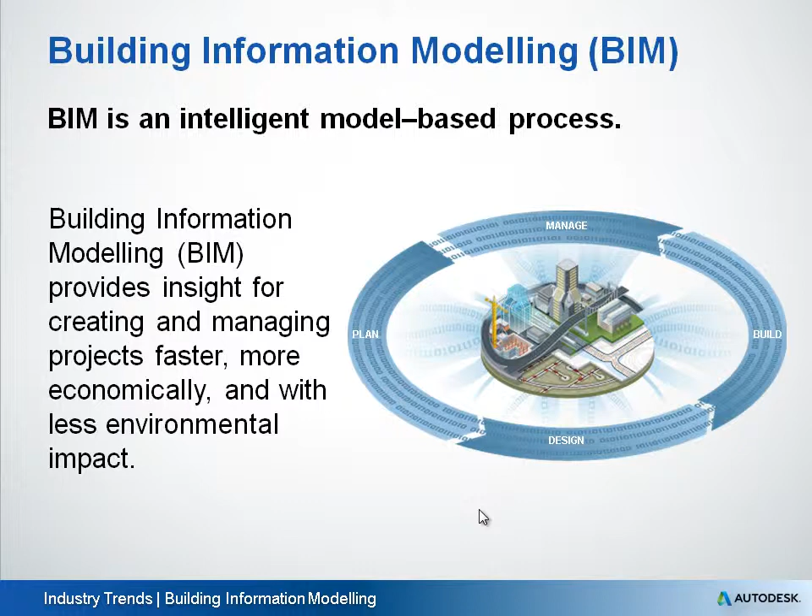A global market analysis and forecast done by Pike Research on building information modeling in 2012 concluded that, for those who are or have been using BIM tools and collaboration techniques for a longer period of time, BIM has proven to be remarkably successful in the quality of the results that it can produce. As for building owners and financiers, BIM has driven costs down and made the estimation process more accurate. Additionally, BIM helps facilitate more visibility and interaction in the overall design build process for the owners of a building, enabling them to take a more active role in determining the final outcome of capital-intensive projects.

In addition, Pike Research suggests that as energy conservation and carbon emissions become increasingly important on a global basis, the adoption of BIM tools and practices will become a higher priority, since it can significantly affect the efficient use of valuable and scarce resources. According to Pike Research, early adopters of BIM tools and practices can gain a significant advantage over their competition. Most BIM applications will be performed on new construction activities, although building retrofits provide a sizable market as well. One of the main reasons for performing a retrofit is to reduce energy consumption, and the latest BIM tools support this work through the availability of rapid energy modeling technologies.

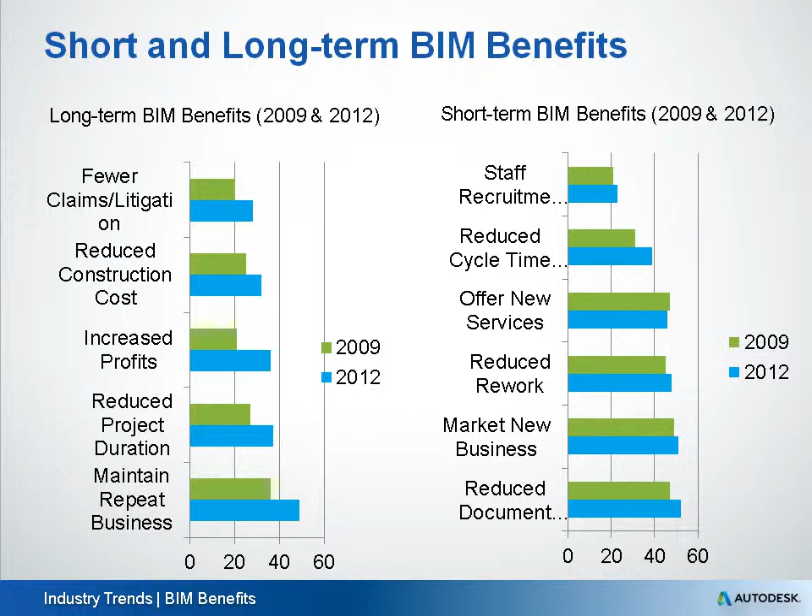In addition, engineers are among the fastest growing segment of new adopters of BIM, so there's a lot of opportunity for engineers to still realize the benefits of BIM.

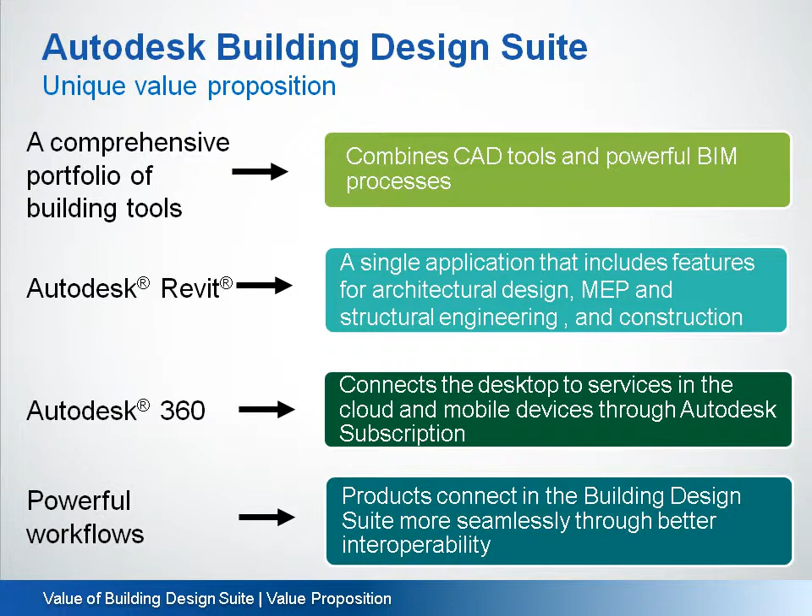It also includes Showcase, which is a 3D presentation and 3D visualization software. And you'll also get SketchBook Designer, which is exclusive to the Design and Creation suites. This enables you to create breakthrough conceptual design sketches for AutoCAD software. New to the suite are AutoCAD Raster Design, Raster to Vector Conversion software, and Autodesk ReCap software, which enables you to capture design information and bring it into your software.

The Premium Edition builds on the Standard Edition and is ideal for architects and engineers who need an optimized set of tools that includes AutoCAD software and adds the power of building information modeling with Revit 2014. It also includes Autodesk 3ds Max Design 2014 software for even more compelling visualizations, and Navisworks Simulate, which provides advanced tools for simulation and powerful features to help you better communicate project information.

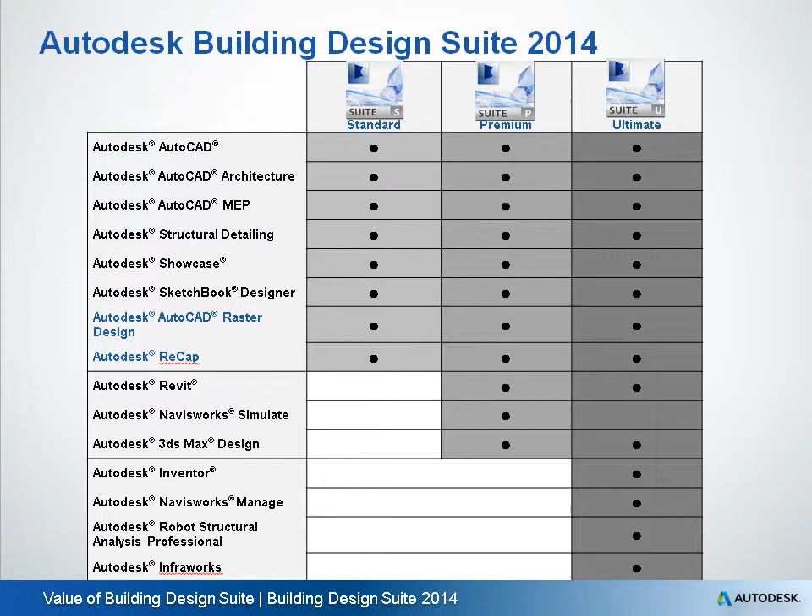Now, those 3 editions of Building Design Suite 2014 have varying Autodesk 360 cloud services available with them. All editions on Autodesk subscription have basic storage, view, and collaboration entitlements. Cloud credits are units of measure that are used to pay for the use of the add-on services. Building Design Suite Standard on subscription includes rendering with Autodesk 360 and Green Building Studio web-based energy analysis software that can help architects and designers perform whole building analysis, optimize energy efficiency, and work towards carbon neutrality earlier in the design process. Benefits are cumulative.

So, Building Design Suite Premium on subscription customers get everything I've just mentioned, plus access to structural analysis for Autodesk Revit and energy analysis for Revit. Ultimate customers add optimization for Inventor and Autodesk InfraWorks 360, which complement the products in the suite.

Now that we've gone through some industry trends and how the Autodesk Building Design Suite plays a role in addressing some of the more immediate business challenges, let's dive in and call out some of the new features in the Building Design Suite that are most compelling for engineers. Autodesk is always striving to improve and expand software capabilities, and this latest release is no exception. As we've discussed, Building Design Suite is created to help support comprehensive building design workflows. So let's talk about what's new in the 2014 release, specific to design, visualization, simulation, and documentation.

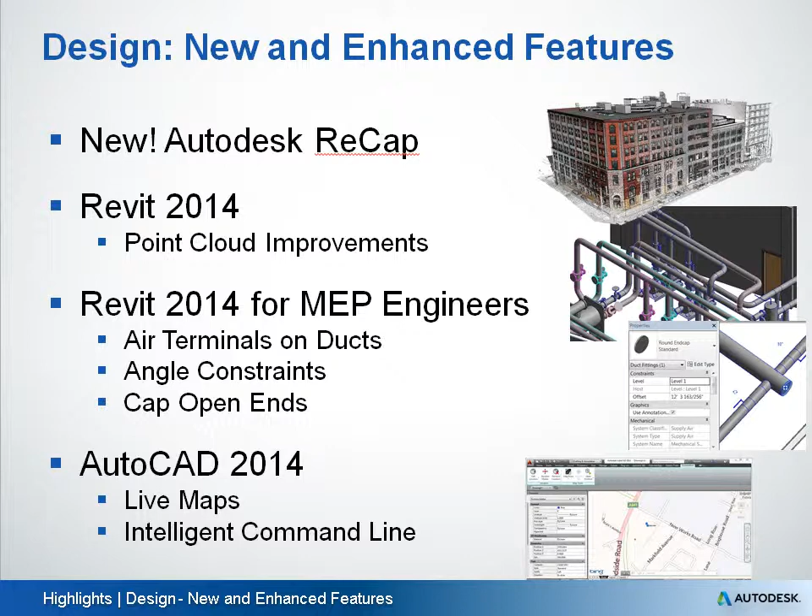Now, in addition to energy analysis of conceptual massing elements in Revit 2014, you can perform energy analysis using detailed Revit models. The Building Elements Simulation option creates an energy analytical model directly from your Revit building elements and sends it to the Autodesk Green Building Studio for simulation using DOE 2.2. Once the analysis is complete, you can review and compare results as you continue to iterate your model and inform your design decisions.

This new feature works both with and without the placement of Revit rooms and space objects, facilitating whole building energy simulation with as little as one click. The tool also accounts for more complex model geometry like sloped walls, varying wall thickness, and plenum spaces. There's no need to prepare the model for analysis or rebuild a separate model.

In this release, the structural analytical model was improved in several different areas. First, there are enhancements to help create and manage the structural analytical model. You can now create filters based on the connection status parameter for greater control over the analytical model. You can also now adjust analytical walls in relation to nodes of analytical floors and analytical foundation slabs.

You also have the ability to schedule analytical and physical element properties together in a single schedule. When you schedule the structural framing category, or any other category of associated structural analytical model categories, you now have the ability to schedule the properties of the analytical elements together in the same schedule. The same capability exists when you schedule the analytical elements.

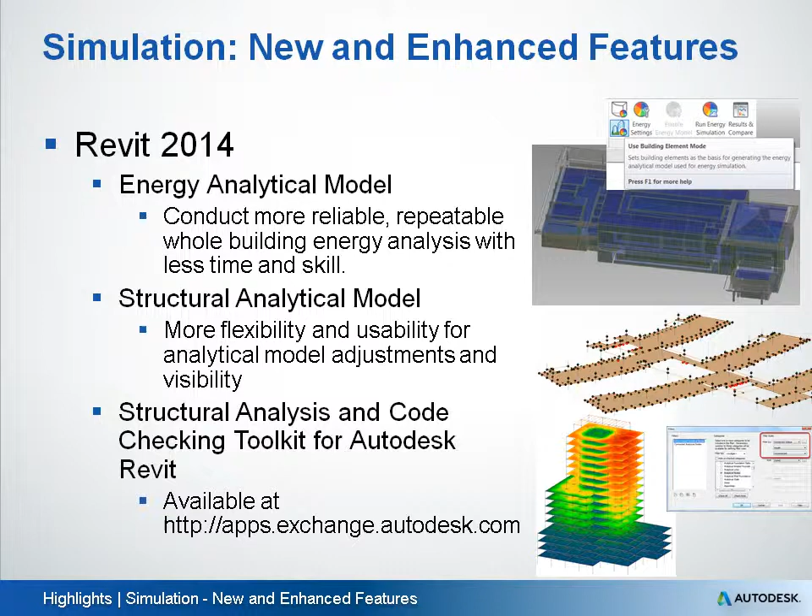In any 3D view, and that includes perspective, model elements can be moved by using the Displace Elements tool. You use this tool to create displacement sets and move them along the X, Y, and Z axis to a specified distance away from the model. Then, you can draw paths that connect these elements back to the original model location.

Revit 2014 features fairly dramatic performance improvements that can seriously impact productivity. In this release, you have an option to temporarily suspend certain features that affect the display of the model. This improves performance when you are navigating a 2D view or a 3D view in ways that manipulate the camera.

And moving on to 3ds Max Design, which is in the Premium and Ultimate editions, an exciting new feature enables you to bring worlds to life in a few simple steps with the new Crowd Animation feature. Offering high-level control of plausible human animation, Populate enables you to more quickly and easily generate moving or idle crowds within selected areas of a scene to enrich presentations with realistic human activity.

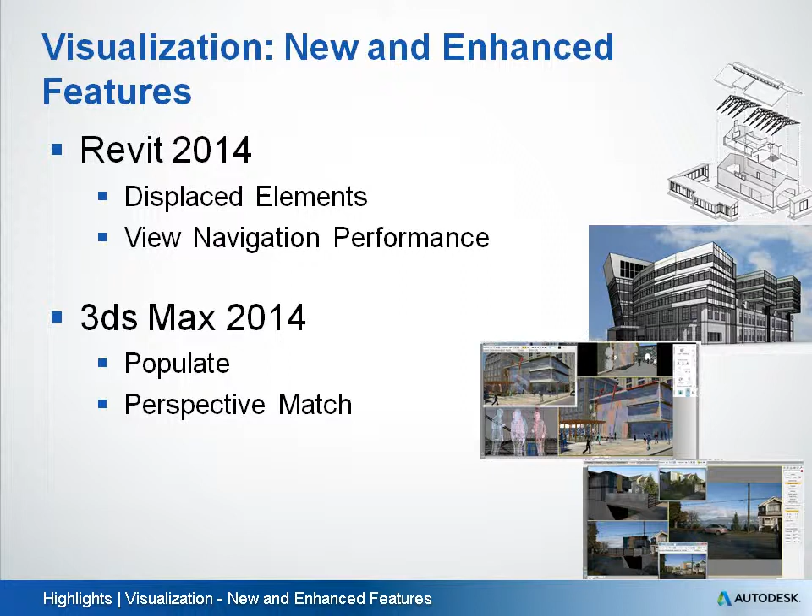The Enhanced Perspective Match feature enables artists to interactively match the camera view of a scene to the perspective of a photo background. With this feature, artists can more easily place a model into the context of a still frame photographic background.

And finally, taking a look at documentation. Autodesk AutoCAD Raster Design is powerful raster editing and raster to vector conversion tools helping you increase the visual information in a building plan. There's also improvements to schedules in Revit.

They give you control of scheduling formatting and increase access to data within BIM. These enhancements can help you with text and table formatting for better customization and more intuitive access to parameters. Text properties and table formatting improvements help give you more control to make your schedules look the way you want.

The new non-rectangular crop tool gives you increased flexibility when you are documenting new and existing layouts, and you can save time by eliminating cumbersome workarounds. Using new tools on the Modify and Draw panel, you can edit the crop region as needed. You can modify the existing lines or delete the lines and sketch a completely different shape. And don't worry, the Reset Crop feature changes the edited crop region to a rectangular shape, and all changes made in sketch mode are discarded.

One of the goals for AutoCAD 2014 was to make efficiency improvements for all users. As a result, this release includes a focus on improving the command line. Auto-correction has been added to the command line, which automatically spell checks user inputs and offers suggestions from a synonym list. This helps compensate for user error to boost your efficiency.

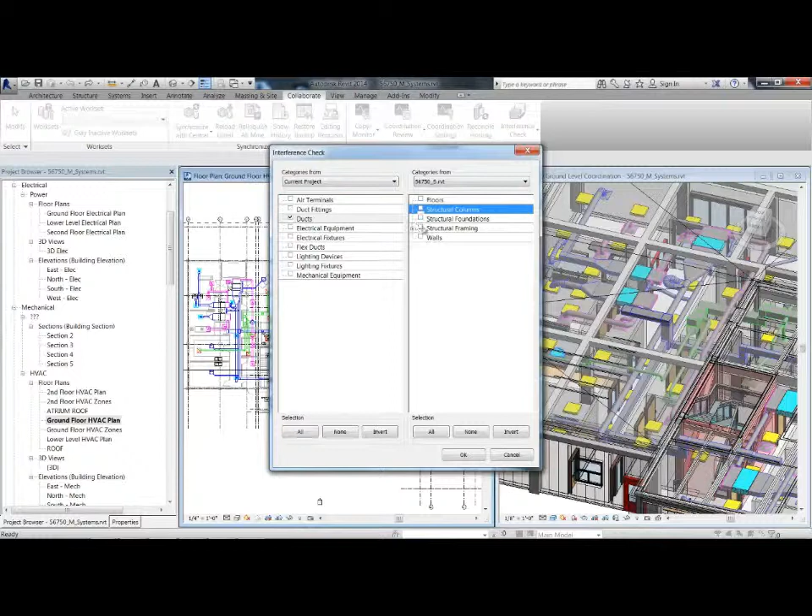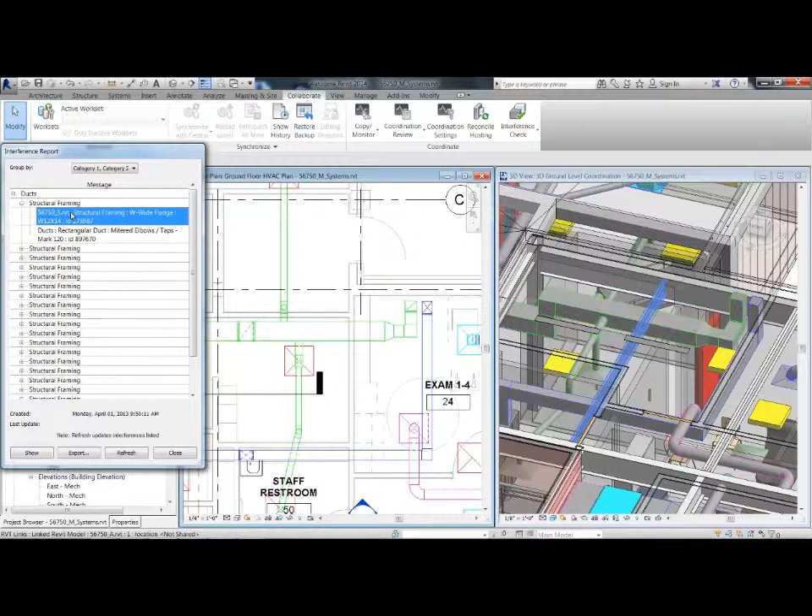Coordination throughout the design process is a necessity and not just something you do at the end of a project. Architects, MEP, and structural engineers alike are responsible for ensuring that the project is fully coordinated to minimize on-site issues that are cost prohibitive to the building owner. Autodesk Building Information Modeling software, included in the Autodesk Building Design Suite Premium and Ultimate editions, enables architects and engineers to detect clashes and interferences in real time between building elements anytime during the design process. Minimizing clashes during design helps reduce change orders that can delay projects and be costly.

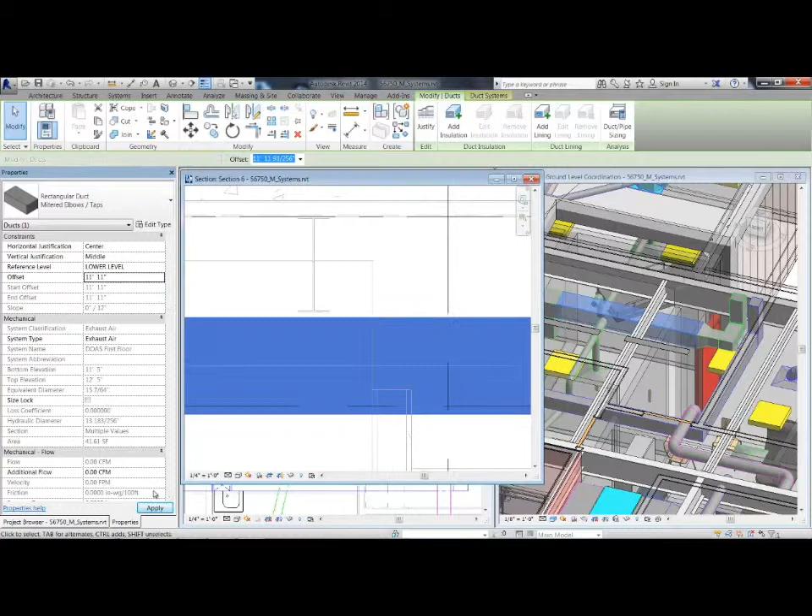Autodesk Revit allows engineers and architects to better coordinate and easily make design changes. Revit's parametric modeling features help ensure that a change anywhere in the design is reflected in every view of the design model and supporting documentation. The internal interference tools in Revit help building professionals visualize how the existing structure, the new construction, and the building systems all fit together, enabling you to make design corrections faster with more informed decisions. Through this collaborative BIM process, you are able to identify and resolve interferences and other issues early in the design phase, before they impact construction costs and schedules.

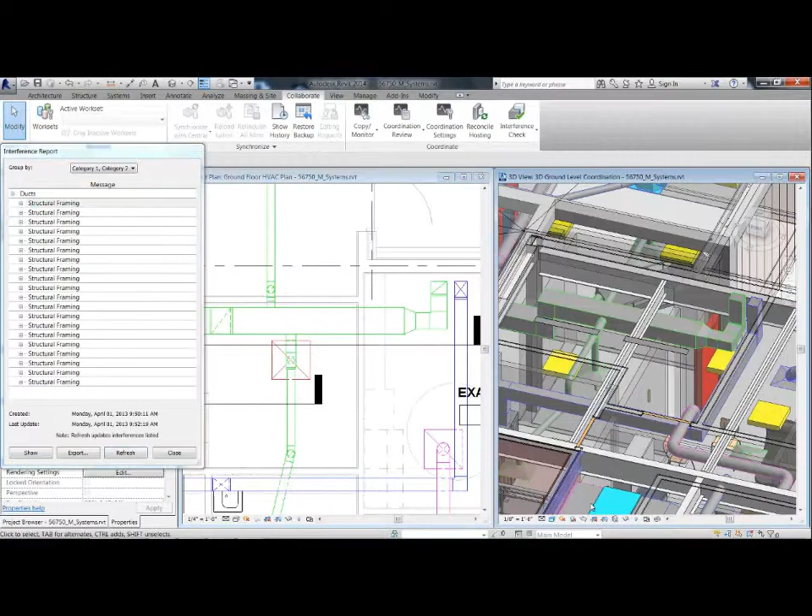The ability to view the interference report and show the clash in the BIM model helps you to quickly resolve the clash and rerun the report to show that the issue has been resolved until all clashes have been eliminated. All views within the model and construction documents have been updated, allowing for a fully coordinated and consistent model. Autodesk Revit and the Building Design Suite allow architects and engineers to more effectively collaborate and interact based on workflow and project requirements.

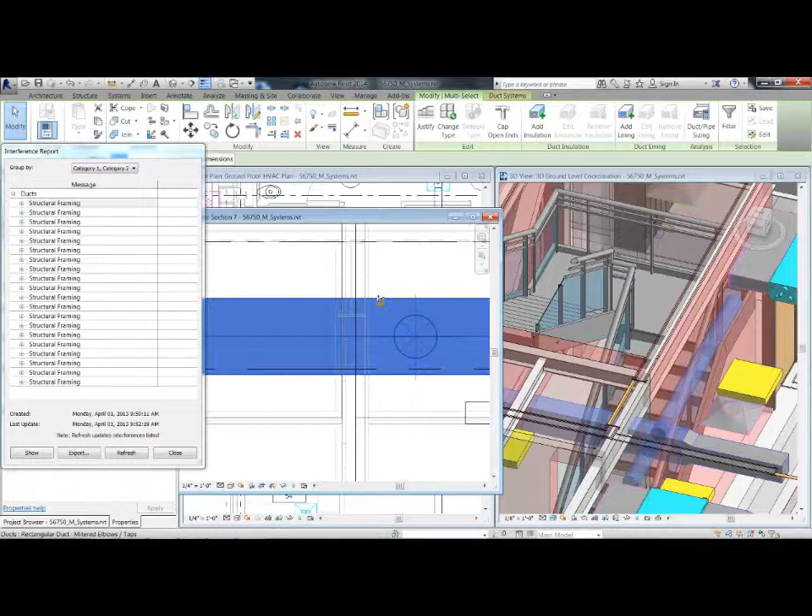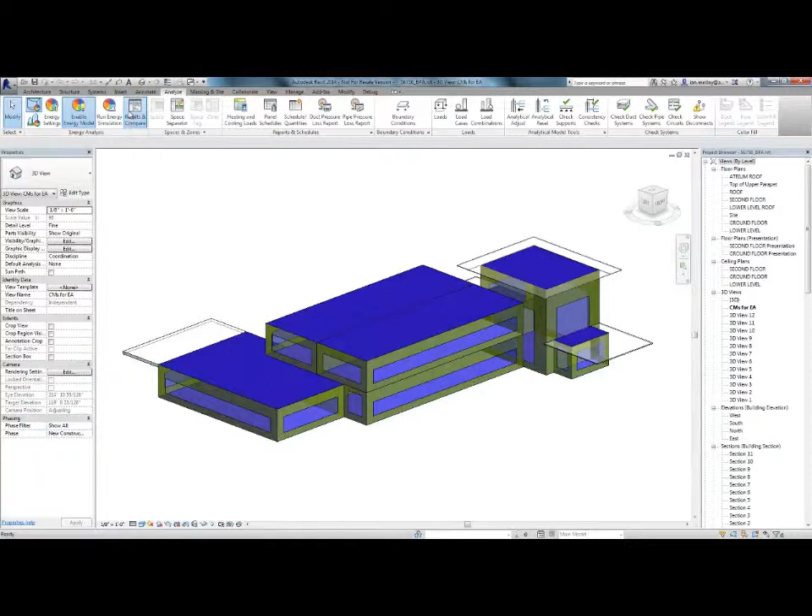Next up, we have another video from Armando regarding optimizing building energy performance. Let's take a look. Building performance analysis provides unique insights into the energy and environmental performance of buildings at any stage in their life cycle, from concept design through to operation and renovation. This is invaluable to delivering and maintaining higher performing buildings more cost effectively and with greater certainty, both of which are critically important investment factors for building owners today.

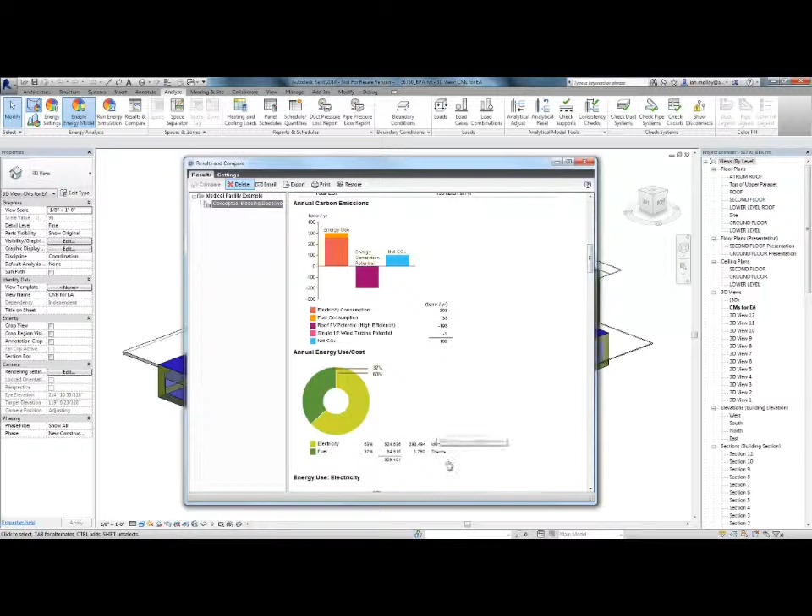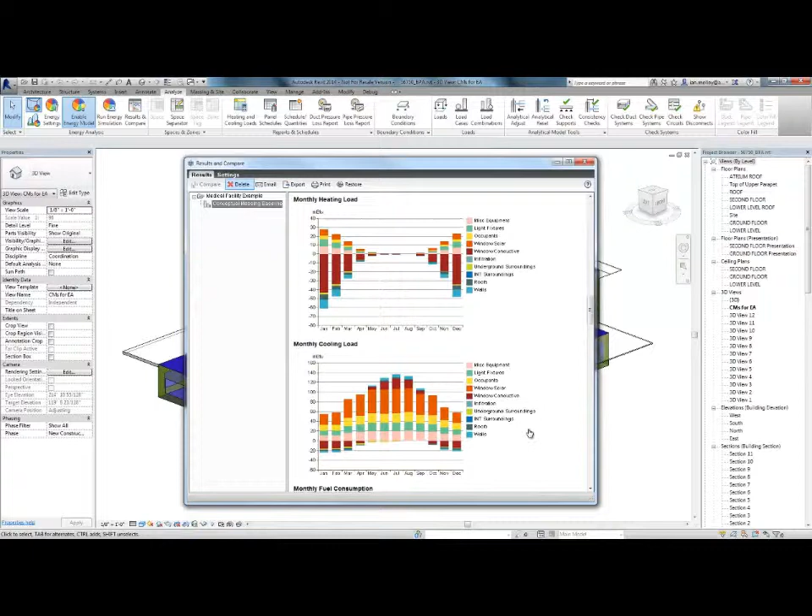Autodesk Revit, included in the Autodesk Building Design Suite Premium and Ultimate editions, as well as Energy Analysis for Revit and Autodesk Green Building Studio, which are available to Building Design Suite subscription customers, contain unique capabilities that greatly reduce the time and skill required to conduct more reliable whole building energy simulation, which is a key foundation of BPA. In the early design stage, architects and MEP engineers can use Energy Analysis for Revit, a cloud-based service to conduct whole building energy analysis using conceptual massing elements for simulation.

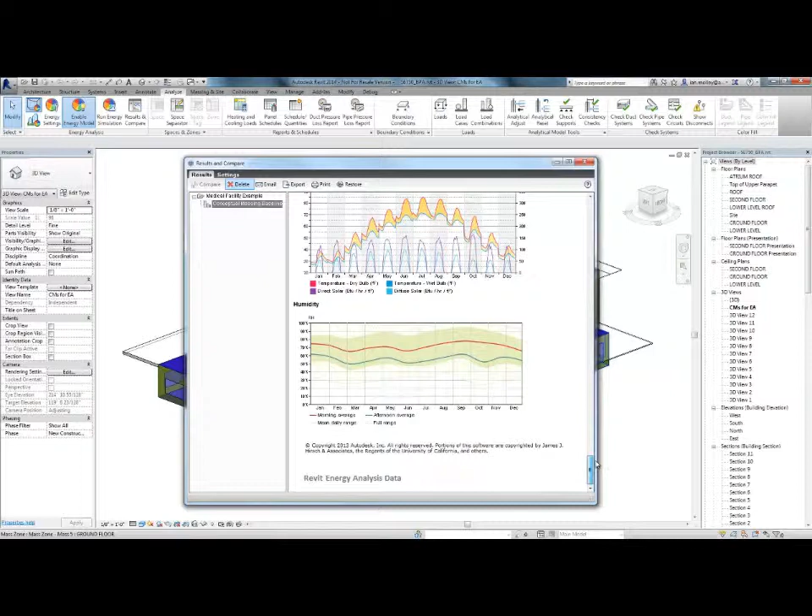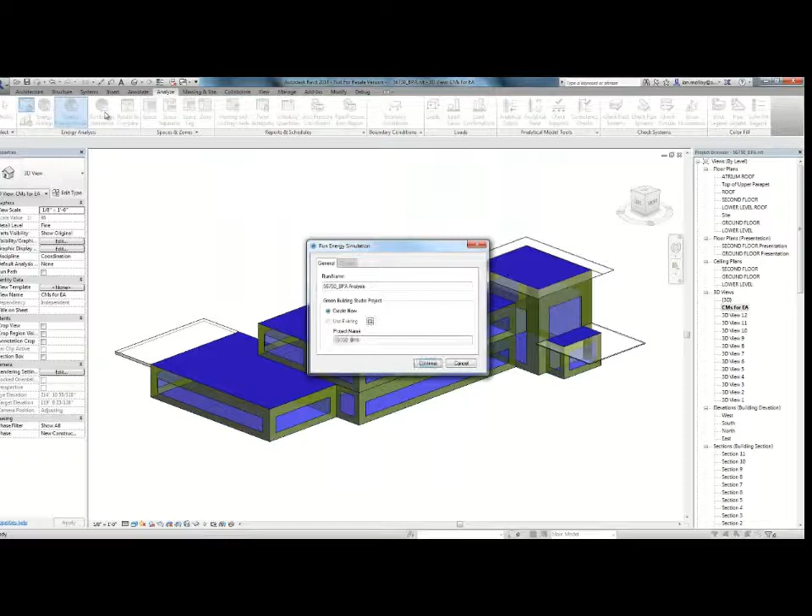Using conceptual massing elements enables you to quickly create complex building design iterations with mass floors for whole building energy analysis. Set the minimum energy settings that are required, like the location for accurate weather data and building type, to run an energy simulation. In addition to energy analysis of conceptual massing elements, Revit elements and features can be used to meet different energy analysis needs throughout the process, from concept to detailed design.

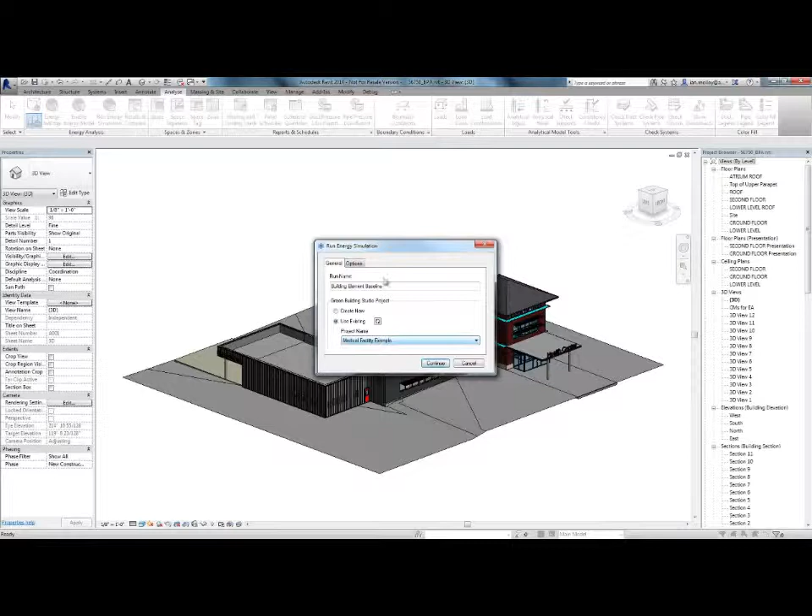You can perform energy analysis using detailed Revit models. The Building Elements Simulation option creates an energy analytical model directly from your Revit building elements and sends it to Autodesk Green Building Studio for simulation using DOE 2.2. This feature works both with and without the placement of Revit room or space objects, thereby facilitating whole building energy simulation with as little as one click.

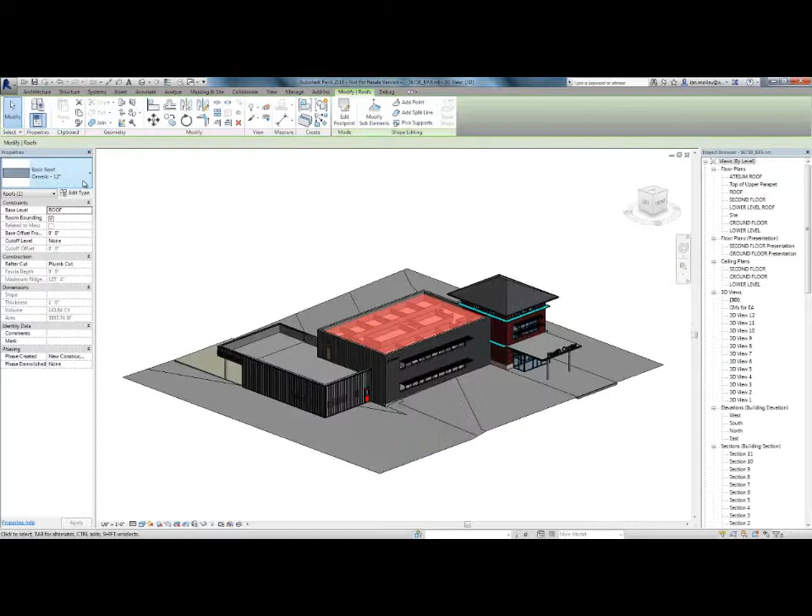The tool also accounts for more complex model geometry like sloped walls, varying wall thickness, and plenum spaces. There's no need to prepare a model for analysis or rebuild a separate model. This innovative algorithm automatically identifies and places analytical spaces and surfaces and creates gbXML for use in third-party energy analysis tools.

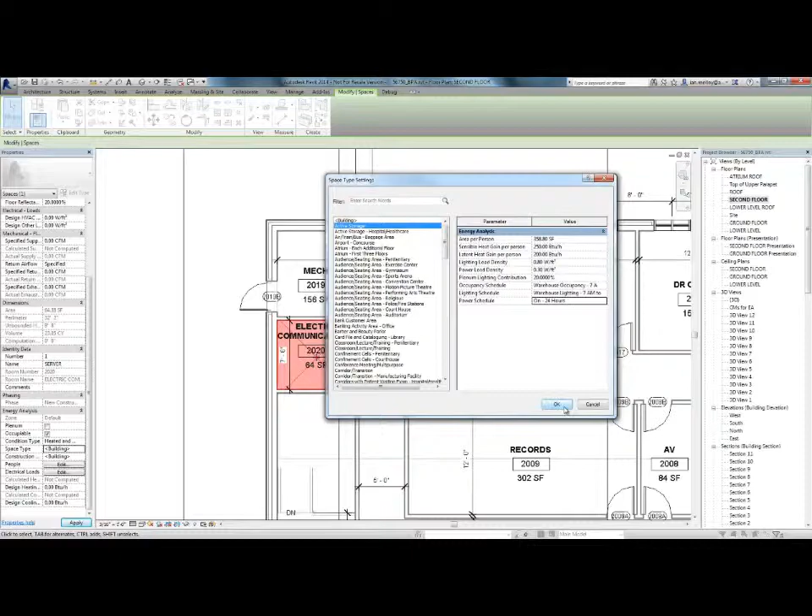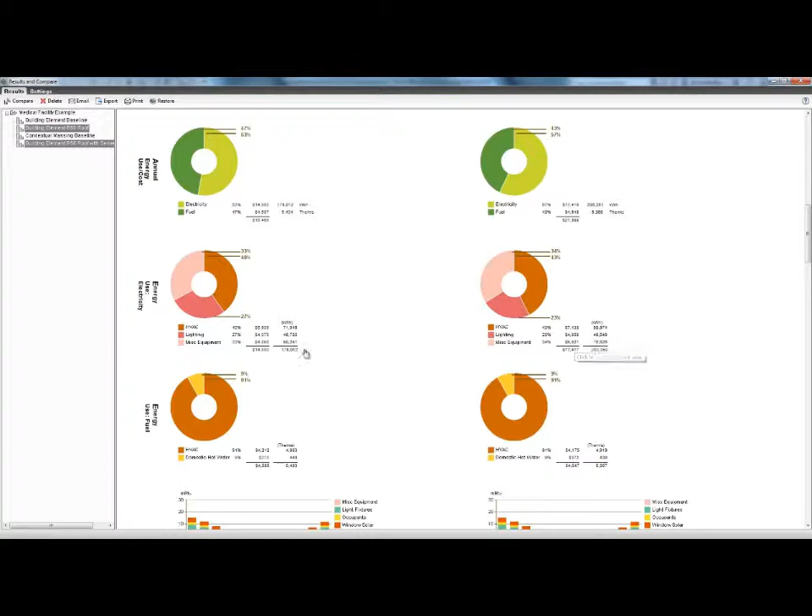Once the analysis is complete, you can review and compare results as you continue to iterate the model and inform your design decisions. You can view the annual energy usage and cost for the building, including HVAC and lighting, as well as water usage and costs.

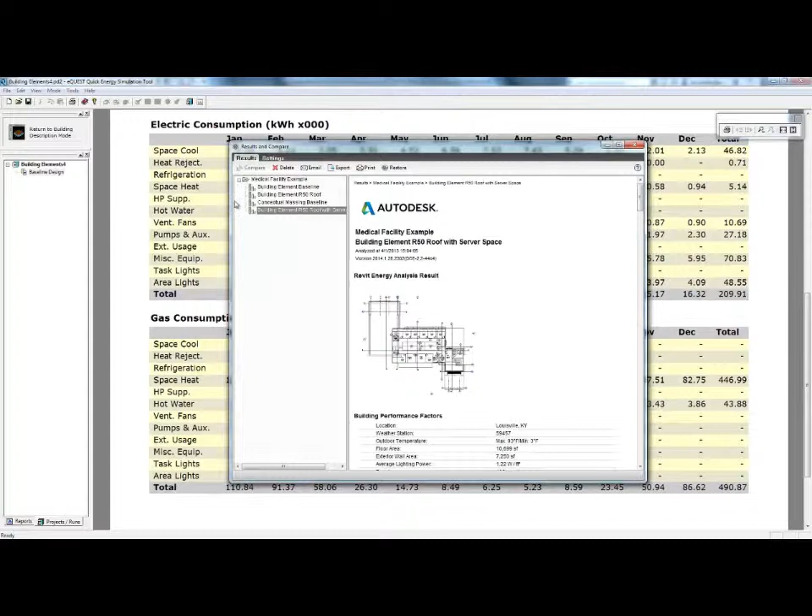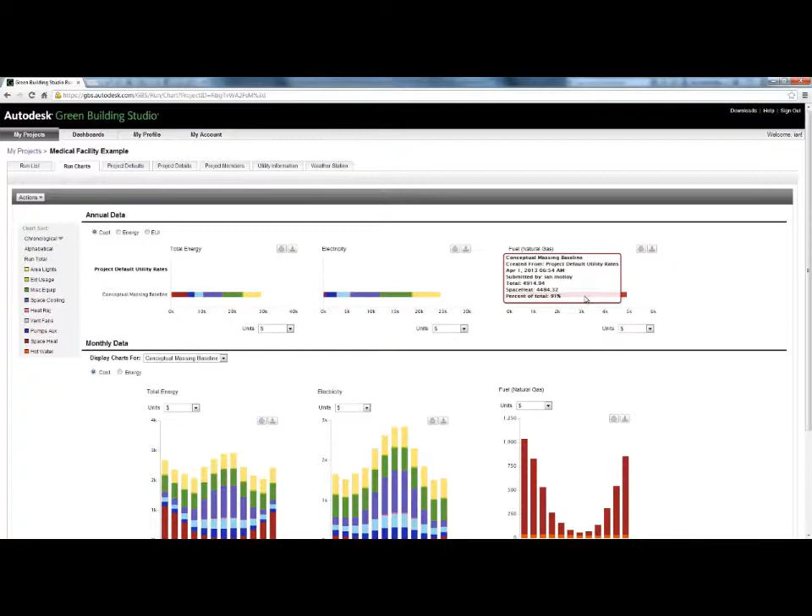Autodesk provides extensive support for BPA industry-standard file exchange formats that allow extension of workflows into a wide range of third-party BPA tools. Autodesk Revit and Autodesk Green Building Studio can help make BPA significantly faster and more reliable, enabling you to design and deliver higher performing buildings. Architects and MEP engineers can adopt more scalable, cohesive BPA workflows to fit into your standard processes using Autodesk Building Design Suite and Autodesk subscription benefits.

Thanks, Armando. Now I'd like to turn it over to the structural expert, Tomasz Fudala at Autodesk.

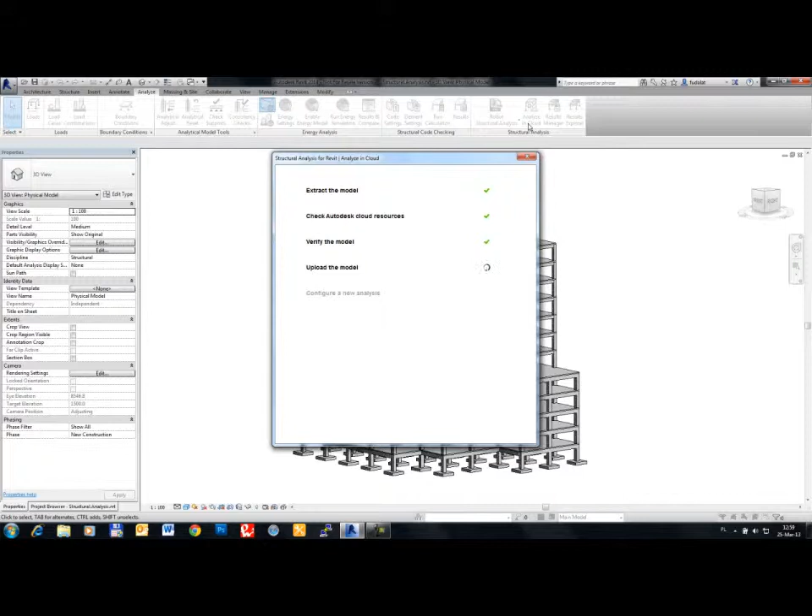Structural engineers and designers must perform calculations such as static analysis as a necessary part of the design process for any building structural project. Traditionally, conducting structural analysis is time-intensive, requiring extensive computing power. However, with the Structural Analysis for Autodesk Revit service, a designer or engineer can continue their design in Revit while static analysis is performed in the cloud. As analysis is conducted, designers and engineers can work on structural documentation or run parallel analysis, helping to increase productivity.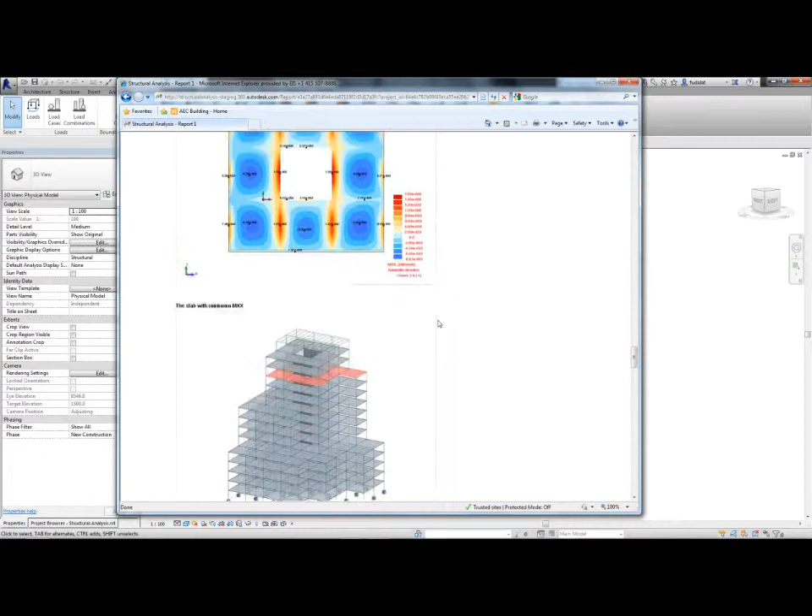Structural analysis is available to Autodesk subscription customers of Autodesk Building Design Suite 2014 Premium and Ultimate editions during the term of their subscription. When analysis is complete, a notification of completion is delivered within the Revit design environment. The results can be explored via a calculation report offering quick insight into conclusions. Detailed results and visualizations can also be downloaded for viewing and further exploration.

Interpretation of diagrams and maps of internal forces allow designers and engineers to make design decisions earlier in the process. Structural analysis complements the Autodesk structural engineering portfolio by integrating analysis into the BIM process. Early analysis helps the structural engineer communicate intent to stakeholders and helps to validate the performance of the structure.

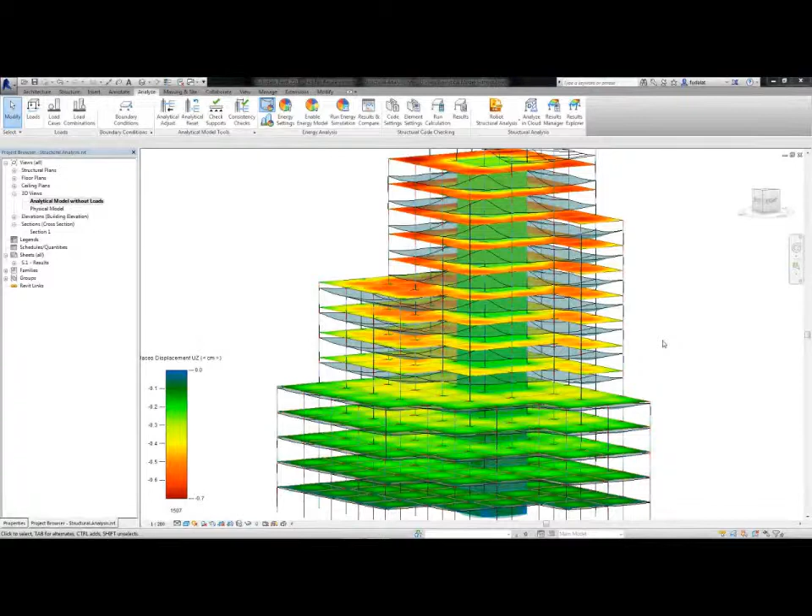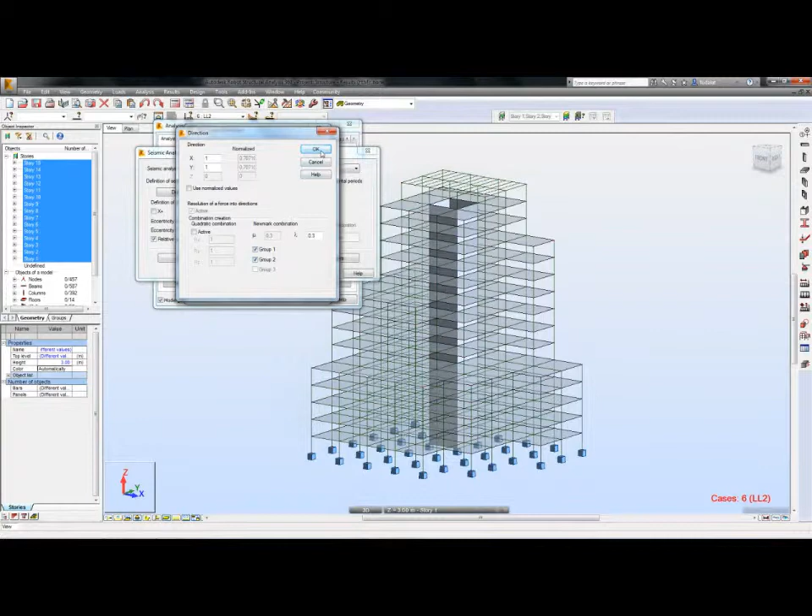The advanced link between Autodesk Revit and Autodesk Robot Structural Analysis Professional software is a fully bidirectional link. This link streamlines structural engineering workflows by facilitating the coordination of the design documentation with structural analytical design information. Many different types of analysis are available within Robot Structural Analysis Professional software, including linear static, modal, nonlinear, seismic, time history, etc. These analyses cover any type of analysis that a structural engineer would have to conduct during a project.

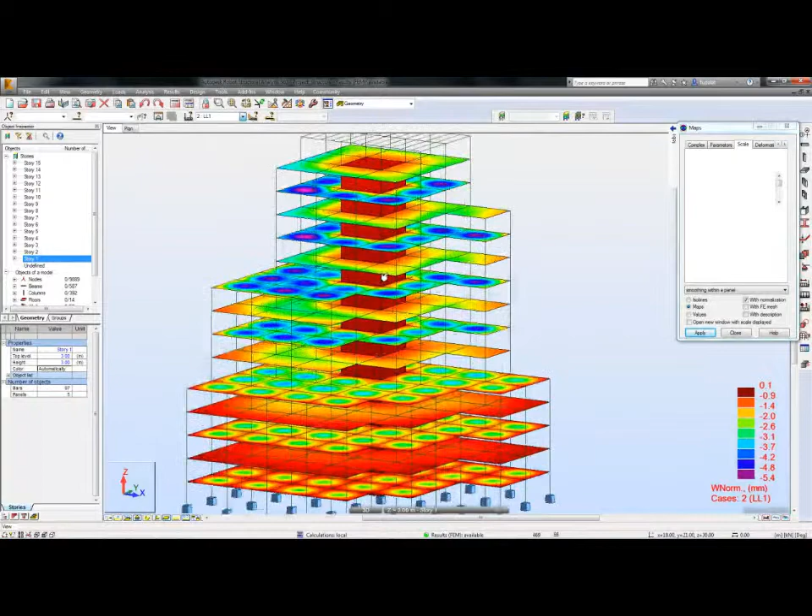Robot Structural Analysis Professional is a powerful tool not only for calculations, but also for visually exploring results. Thanks to many different ways of presenting analytical results and the ease of access to them, structural engineers can very quickly prepare the final structural documentation for review and input by project stakeholders.

And for the fourth and final workflow video, I'd again like to turn it over to Thomas from Autodesk.

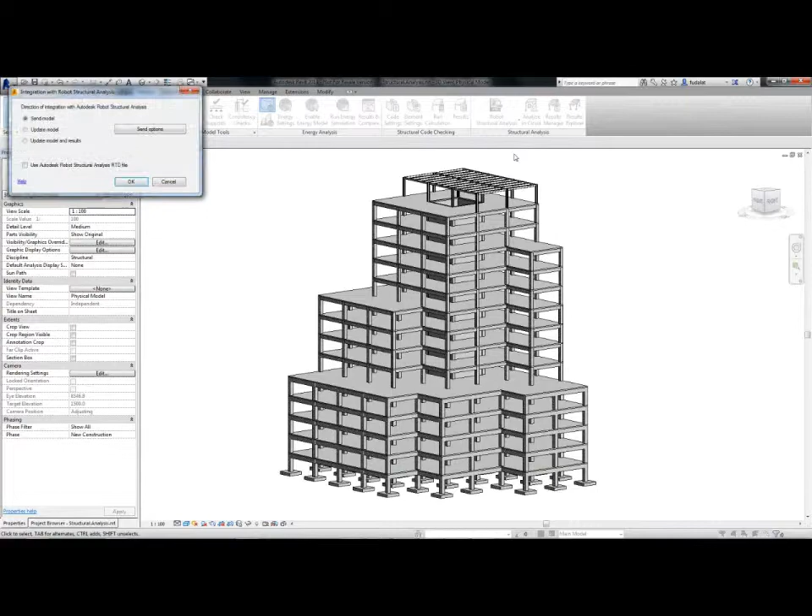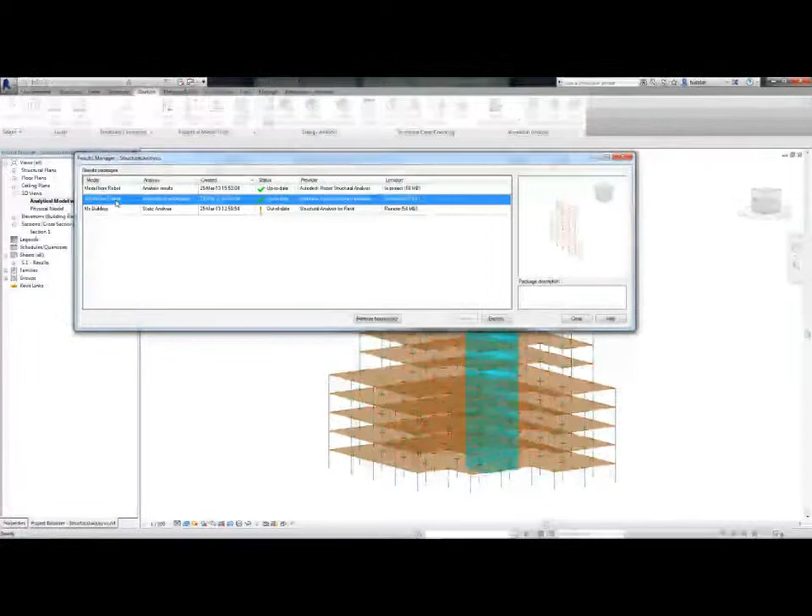After the code checking phase, all design information is leveraged during the structural detailing stage. For some structural engineers and designers, the documentation process extends beyond what are traditionally considered construction documents to fabrication or shop drawings. With the Building Design Suite and a valid subscription, structural engineers can share their designs with other extended teams, drafters, detailers, and fabricators using Revit extensions.

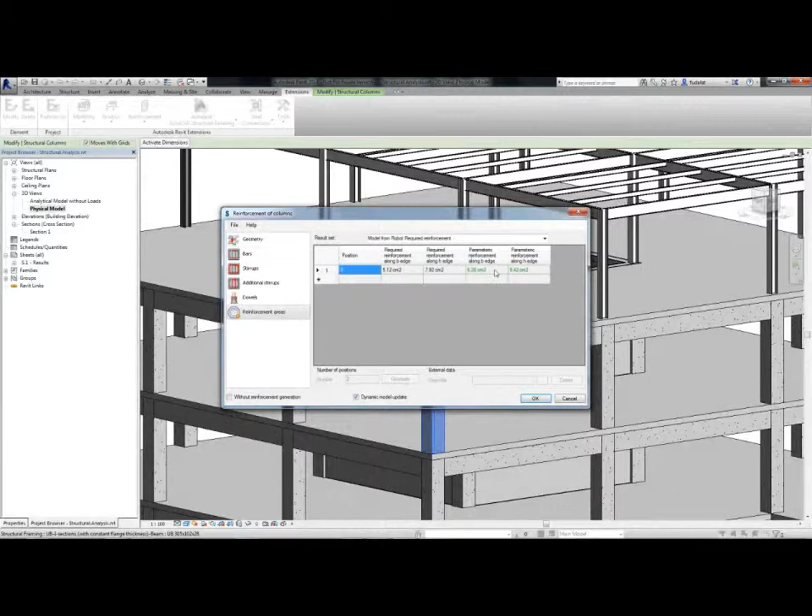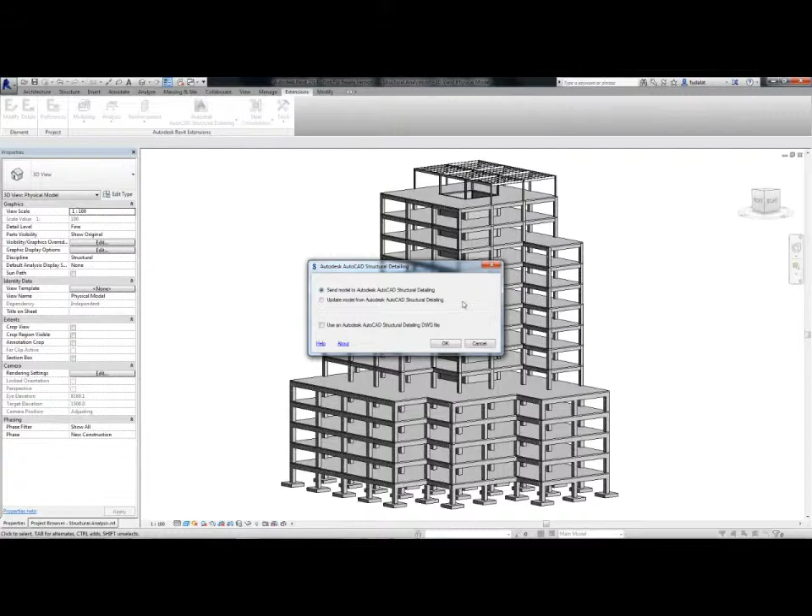Theoretical reinforcement data designed in Robot Structural Analysis Professional can be visualized in Autodesk Revit and used during modeling of 3D reinforcement in concrete elements. Also, to support this workflow, the Building Design Suite includes AutoCAD Structural Detailing software. Built on the familiar AutoCAD software platform, it's structural engineering software for steel and concrete structures. The AutoCAD Structural Detailing link is used to send the steel or concrete model information from the Revit environment to AutoCAD Structural Detailing.

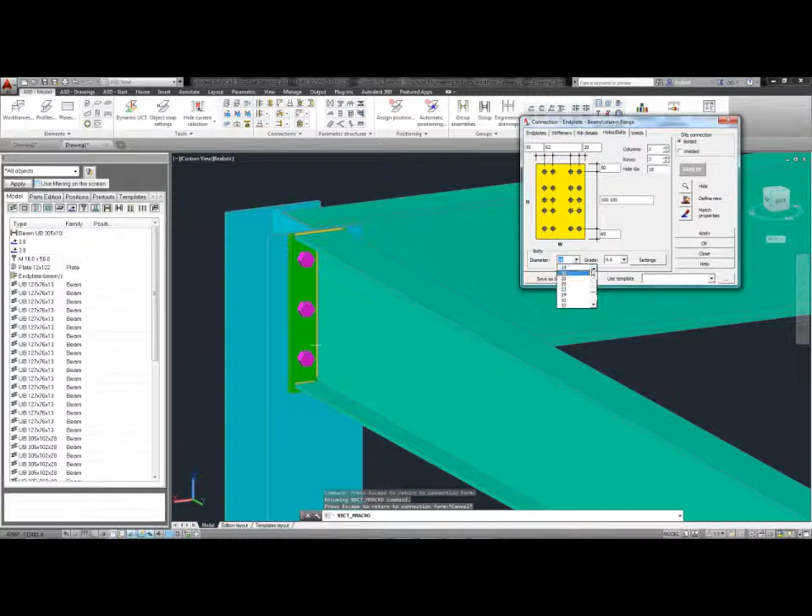AutoCAD Structural Detailing software helps structural engineers, detailers, and fabricators create more precise detailing and fabrication shop drawings. These highly detailed drawings fully represent all pieces, connections, and other structural elements exactly as they will be fabricated and assembled. This model information includes detailed reinforcement, concrete geometry, as well as steel framing.

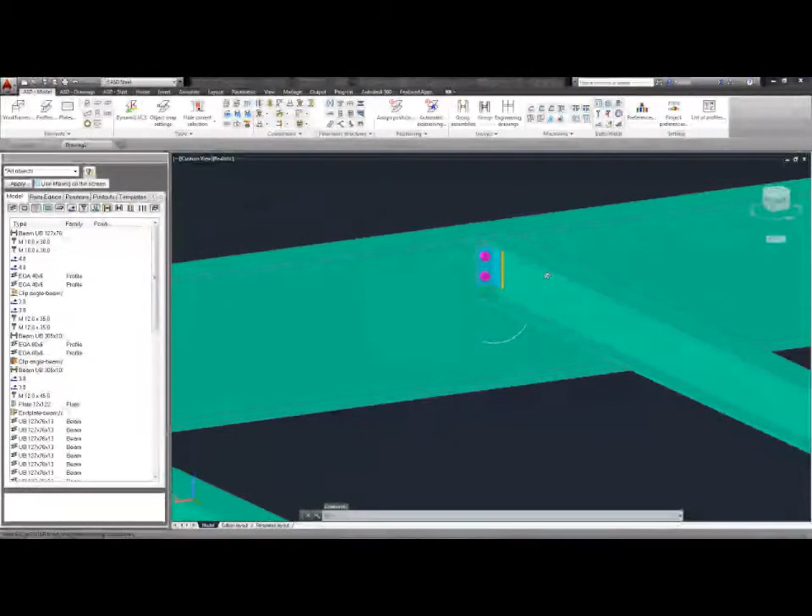Once the model is in AutoCAD Structural Detailing, the detailer can begin the process of supplementing the basic structural geometry with more detailed steel connections information. Once the model has been supplemented with all desired connections and detailed information for steel detailing, AutoCAD Structural Detailing provides automatic generation of shop drawings and material takeoff capabilities.

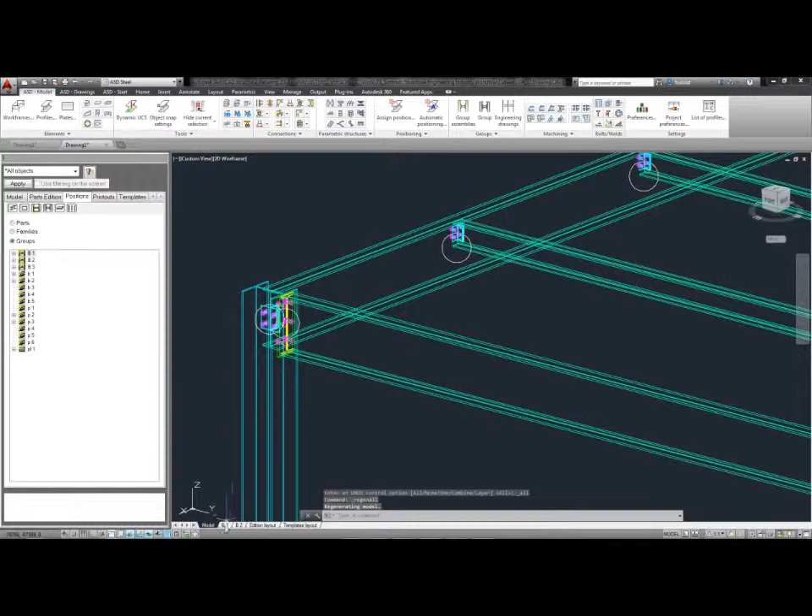Also, AutoCAD Structural Detailing provides direct links to computer numeric controlled (CNC) fabrication machines through DSTV format, helping to minimize redundant data input for the fabrication of steel parts. AutoCAD Structural Detailing supports the BIM process for structural engineering by extending structural design workflows to fabrication, enabling a more efficient and accurate process for creating fabrication details and drawings.

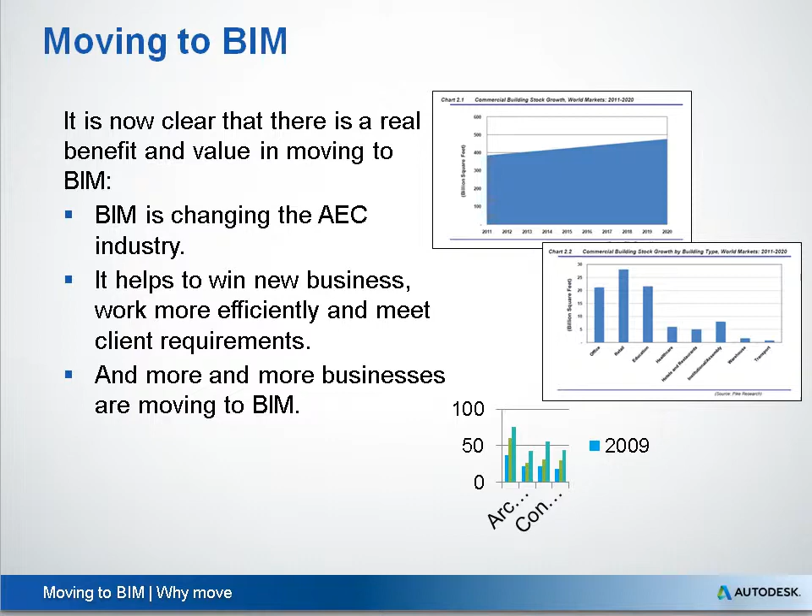Earlier, we talked about the value of BIM and how it is changing the AEC industry, the short and long-term benefits of BIM, and the adoption levels by discipline, all of which is pointing to the fact that BIM is now a key part of the industry. So how do you move to BIM, and what are the barriers you may face? Autodesk's most successful customers have realized that BIM is first and foremost a business decision. They have clearly identified how BIM will support their organization's strategy. There is a common vision built on business objectives.

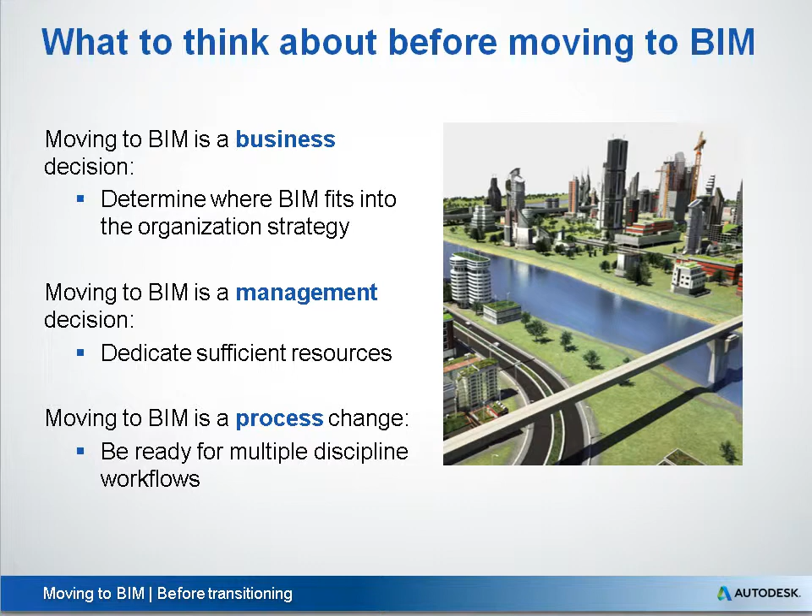They have also acknowledged BIM is a management decision. Adequate resources have to be committed to meet the goals. Most projects will fail without proper resources. Last but not least, BIM involves changing existing processes. If you want to realize the bigger benefits of BIM, you will restrict your return on investment if you simply replace CAD with BIM tools in your existing processes.

So what do you need to think about when moving to BIM? First of all, you need to develop a strategy. This should assess and establish the following. What is the current state of your business's BIM capabilities? How does moving to BIM align with your business goals? And does introducing BIM into your business change how you prioritize these business goals? Once you've assessed and answered these questions, you need to define a roadmap for implementing BIM into your business. This roadmap can detail how you do this at either an enterprise or a project level, or both.

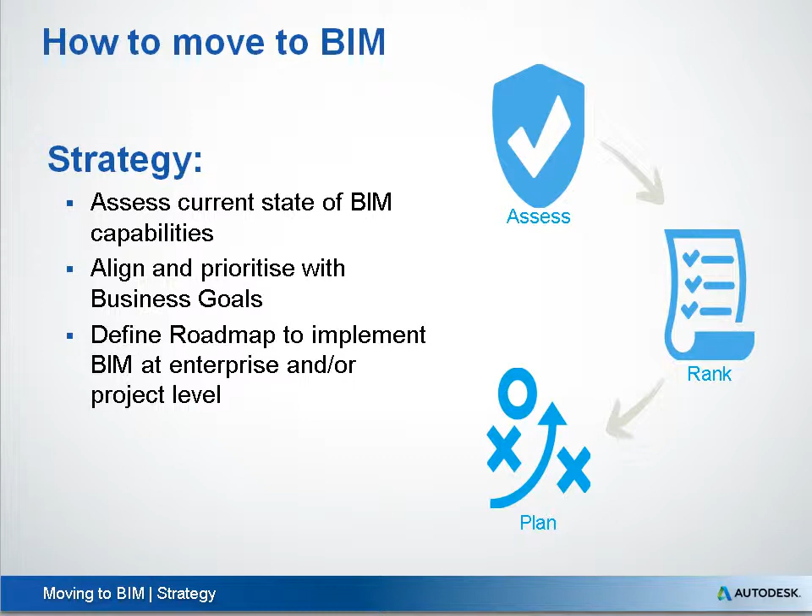Once you have identified your strategy and created a roadmap, you can move into the implementation and integration stage. This stage involves people, processes, and technology. Overall, you are creating the new standards and processes that your business will use. There are a number of interdependent pieces, including building a data model, integrating the model with analysis tools, collaboration methods and tools, data management, and quality control. The aim is to deliver processes and tools which provide the ability for you to generate your project deliverables.

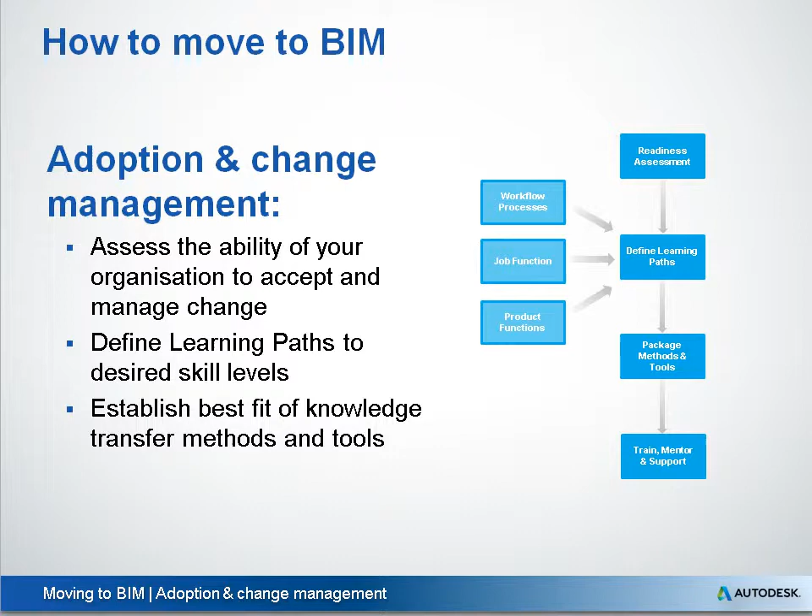Next, identify and develop the methods and tools to be applied to your environment. This could include instructor-led training, custom training materials, webcasts, external or internal user support staff, ebooks, and more. Finally, deliver the training, mentoring, and support to the user community.